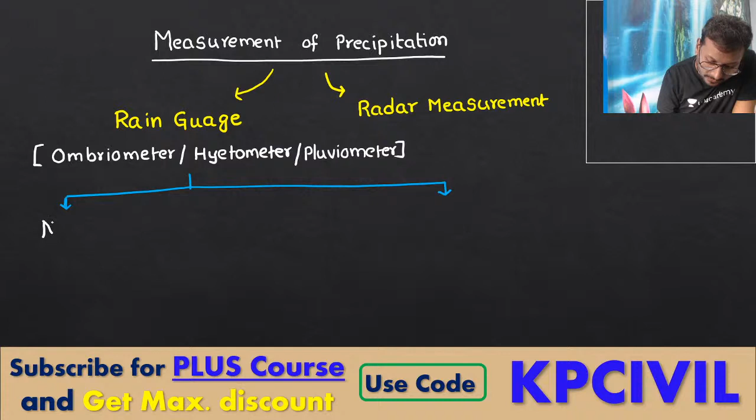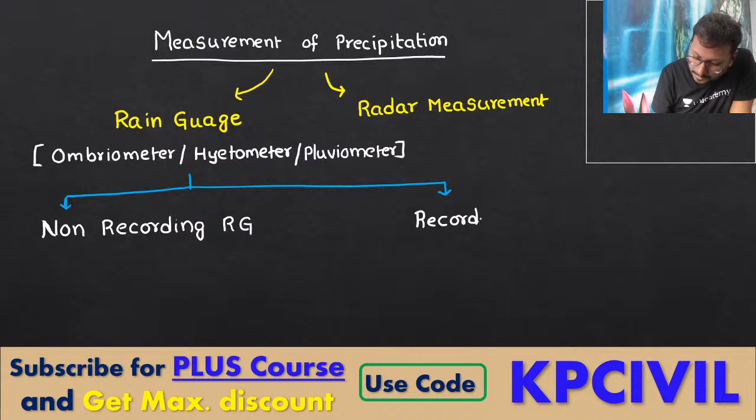Pluviometer. The other names for the rain gauge: ombriometer, hyetometer, pluviometer. Again, rain gauges have been classified into 2 types. Based upon how they perform the work, rain gauges are classified into non-recording rain gauges and recording rain gauges.

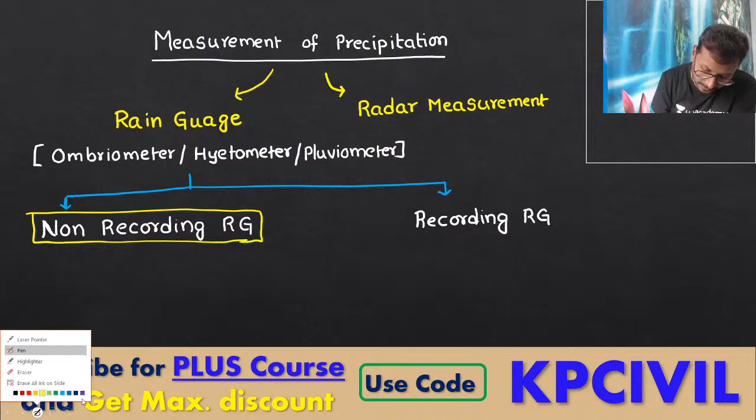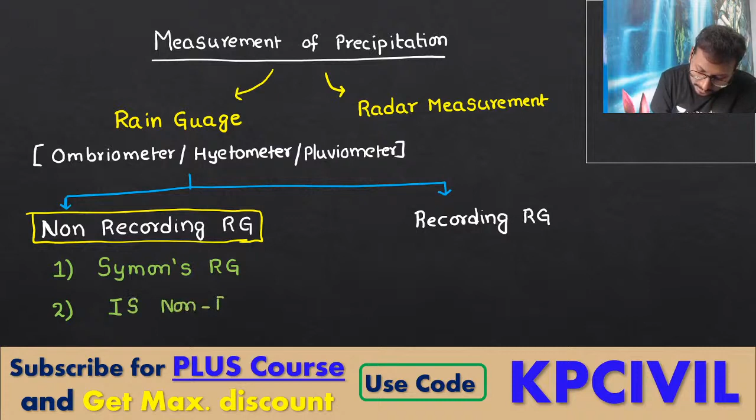Non-recording is again differentiated into 2 types. The first model of non-recording rain gauge, Symon's rain gauge. Second one, IS non-recording rain gauge, Indian standard non-recording rain gauge. Again, recording rain gauges are differentiated into three types. Tipping bucket type.

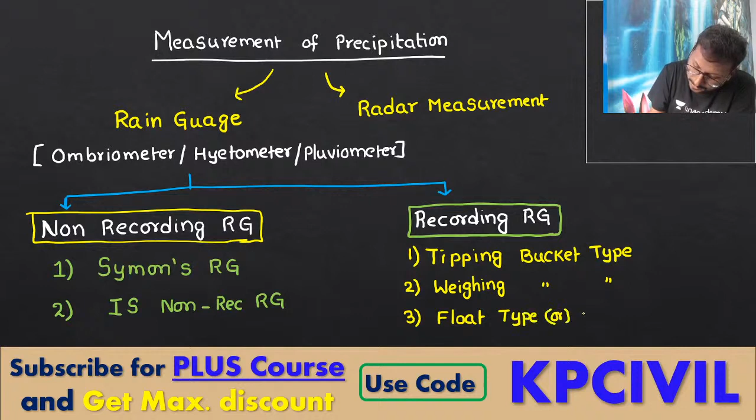Yes, Rahul, IS non-recording rain gauge. Weighing bucket type. And the last one, float type or siphon mechanism. So these are the instruments used to measure precipitation: rain gauge and radar measurement basically. Rain gauge is also called ombriometer, hyetometer, pluviometer.

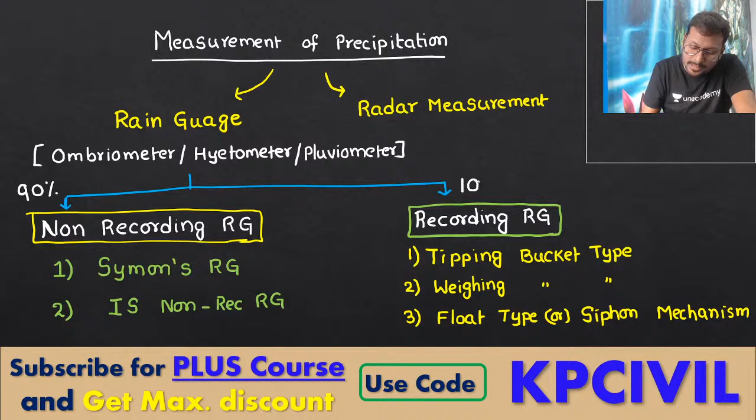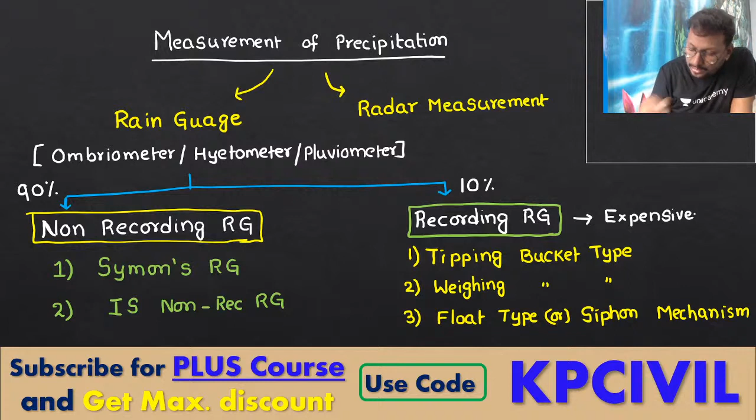Non-recording rain gauge. 90% of rain gauges provided in a certain location are non-recording. 10% of rain gauges are recording. Because recording rain gauges are costlier, expensive. We are not going for all recording rain gauges because recording rain gauges are expensive.

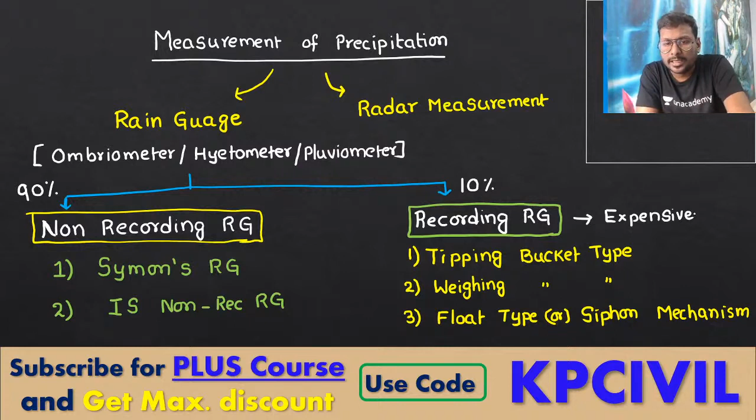What happened, Rudraji Singh? What are you saying? I am not getting it. Okay, is it clear? We'll move on. I will explain one by one. Okay, Ruxar Bano.

Non-recording type of rain gauges. Whatever I have written as RG is not RGV, it is rain gauge. Don't take it as RGV. So non-recording type: the name itself provides you the information. What is the information provided?

Non-recording does not record any result. Will a non-recording type of rain gauge give you any kind of result? Does it give any graph? Does it provide any value to you? No. A non-recording rain gauge does not provide any kind of record of the results. Then what will it do? What is the only function of a non-recording rain gauge? Tell me, any one of you.

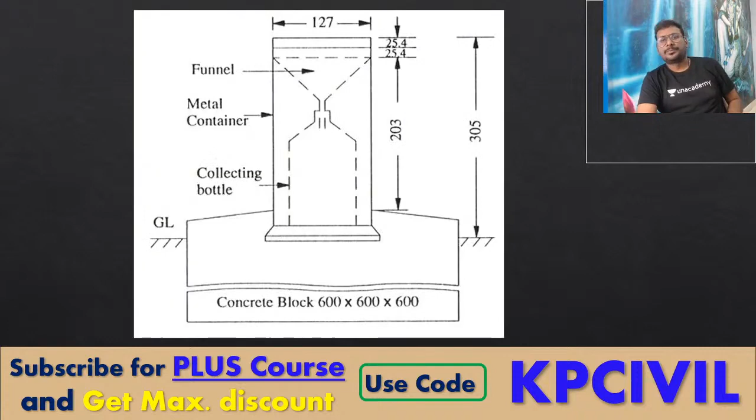The non-recording type of rain gauge just performs collection of water. Collected water is transferred to a measuring jar, then volume is estimated. Then volume by area of collector is depth. Depth by duration is equal to intensity of rainfall. How does it look? This is a non-recording type of rain gauge.

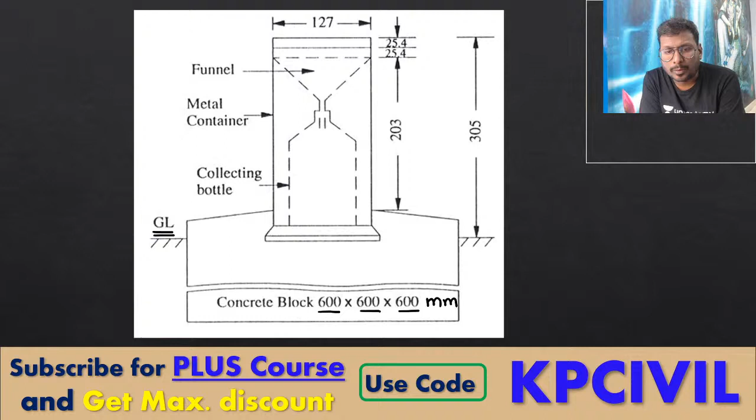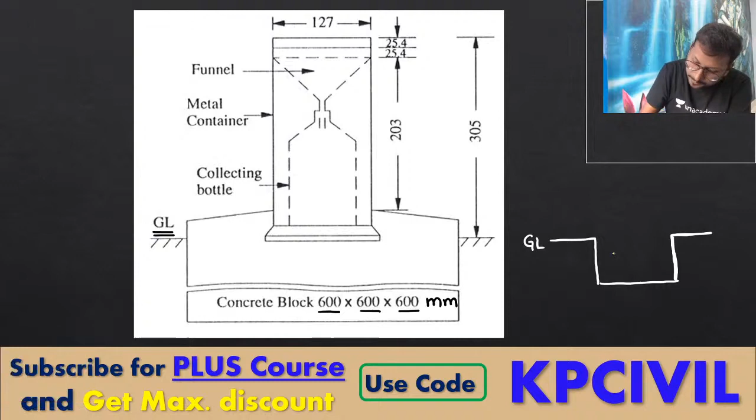So below ground level we are excavating. This is ground level. This picture gives you clear information. We are excavating 600 mm, 600 mm, 600 mm. Then a concrete block is provided, a cement concrete support. So this is ground level, we have excavated below ground level, and after excavation we are making a cement concrete support.

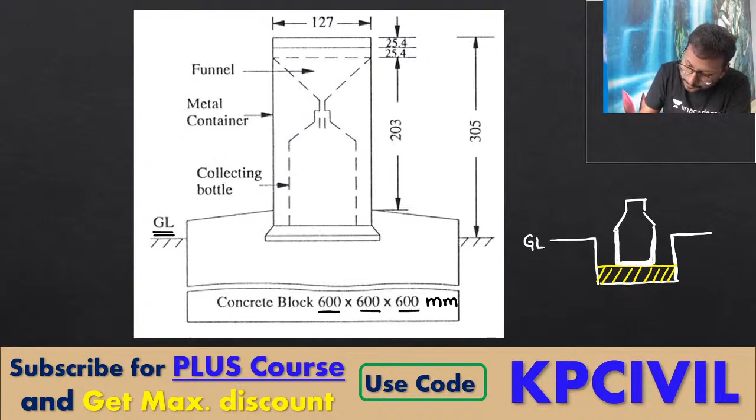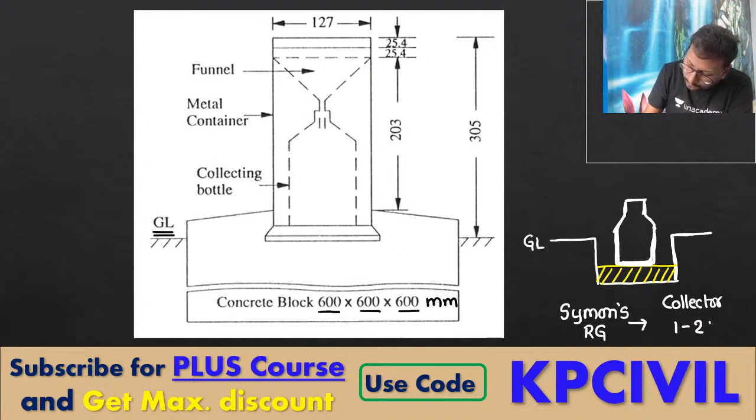Onto that cement concrete support, we are placing the container or collector. This is the only collector which collects the water during rainfall. For a Symons rain gauge, the collector collects a water quantity of 1 to 2 liters.

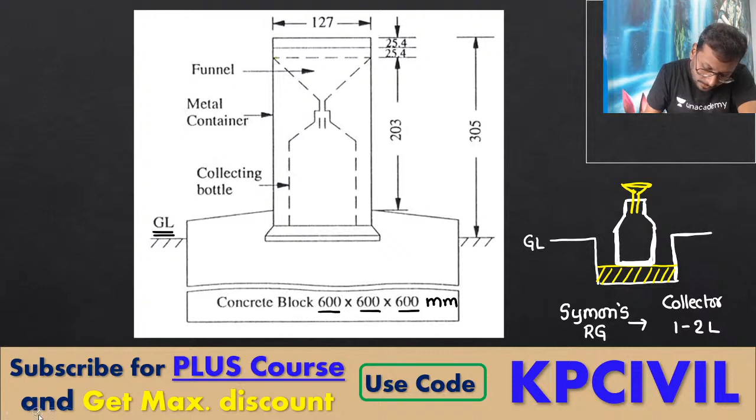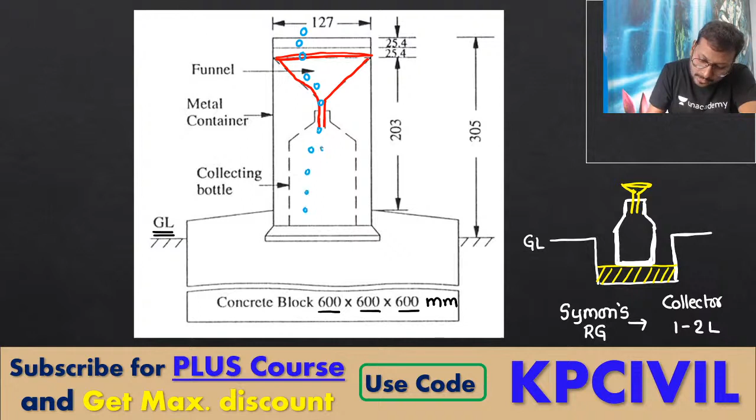And at the top of the collector, will water directly fall down? No. We are placing a funnel at the top of the collector. This is the funnel provided here. I think you understand by this diagram. The collector is placed in a box. Water droplets from the atmosphere fall drop by drop into the funnel, then from the funnel to the collector. So rain water droplets are collected in the collector. Is it clear?

Very important thing, you can write down very clearly. The diameter of the collector provided is 12.7 centimeters, and the height of the rain gauge provided is 30 centimeters. These two values are very important for you. What is the diameter of the collector? They will ask you a theoretical question. The diameter of the collector is clearly written as 127 mm; in the picture, the values provided are in millimeters. 12.7 cm is the diameter of the collector, 30 centimeters is the height of the rain gauge.

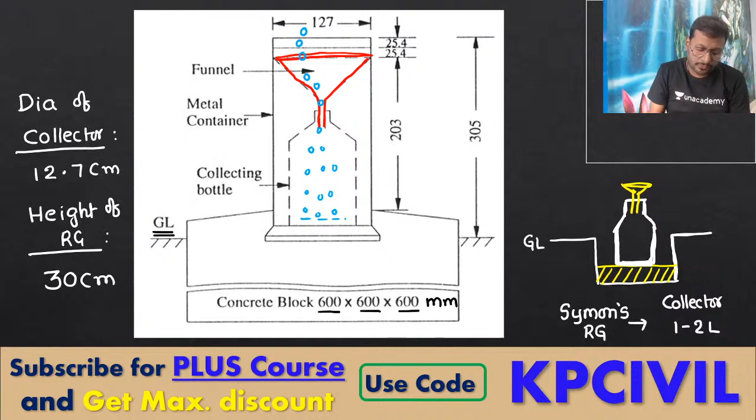So water falls down from the atmosphere to the funnel. The funnel will collect and release water into the bottle, the collector. After completion of rainfall, water is transferred from the collector to the measuring jar. We estimate the volume of water collected, divide by area, and get the depth of rainfall. Okay? Then, what is the difference between the Symons rain gauge and the IS non-recording rain gauge? Everything is the same except two things.

It is an improvised one. IS non-recording rain gauge is an improvised Symons rain gauge. You can write down like this only. Improved. IS non-recording rain gauge is an improved Symons rain gauge. What is improved in the Symons rain gauge?

First of all, material. In Symons rain gauge, it may be glass or aluminium material. Now, IS non-recording rain gauge, fiber reinforced polymer, FRP material. That is the improvement in the Indian standard non-recording rain gauge. You understand the point? Symons rain gauge is made of glass or aluminium, but Indian standard non-recording rain gauge is provided with fiber reinforced polymer FRP material.

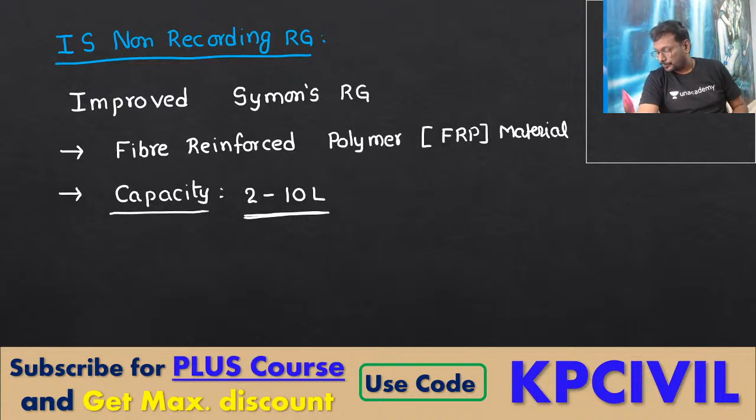What is the capacity here? Symons rain gauge, written clearly, collector capacity 1 to 2 liters. But Indian standard non-recording rain gauge collector capacity is 2 to 10 liters, to avoid replacement of the collector time to time if heavy rainfall occurred. These are the two most important differences between IS non-recording rain gauge and the Symons rain gauge. Clear? We'll move on now.

Disadvantages of non-recording rain gauge. Observer must be present, it is manual. Presence of observer 24/7. Then, replacement of collector after filling.

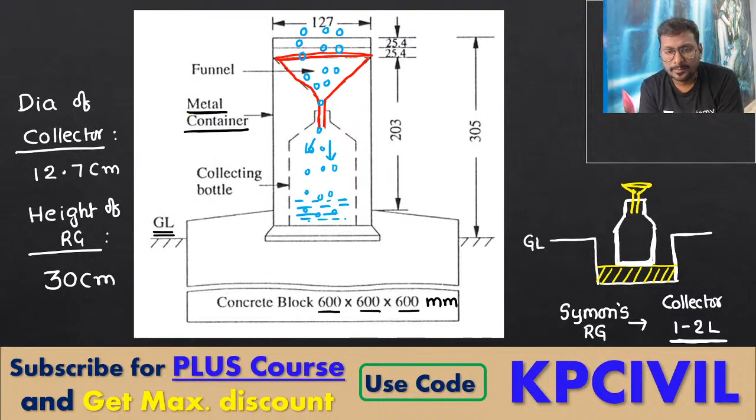So during the replacement of the old container by the new container, taking out the filled container and placing an empty container, some quantity of rainfall water is not collected. Missing collection of water during replacement.

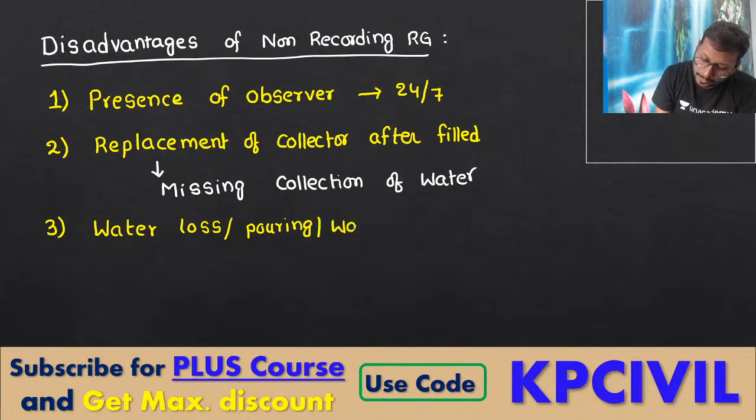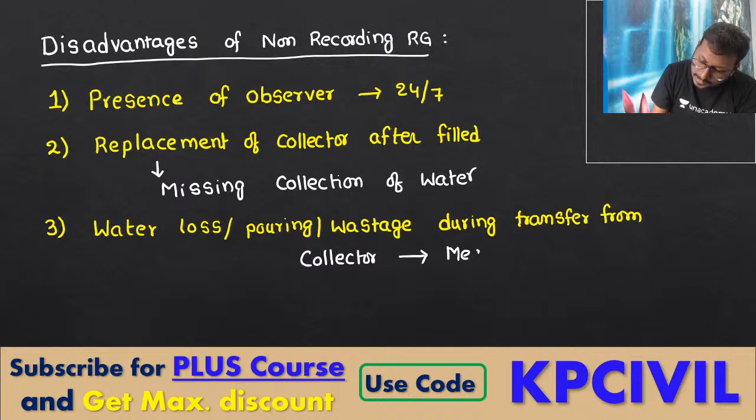Then, water loss or pouring or wastage while you are transferring from collector to measuring jar, because you need to measure volume. During transfer from collector to measuring jar, some quantity of water spills out.

Will you do it carefully? Most government employees, observers, will just transfer from one container to the other. So spilling, loss and wastage of water will happen. Even normally, when you transfer water from one container to another in the lab, some droplets of water get wasted.

And finally, everything related to the non-recording rain gauge is manual work. During this manual work, will you get an accurate value? You got a government job, you became an observer at the rain gauge station. Every day, throughout 365 days, you wait for rainfall, suddenly rainfall occurs. Will you do your manual work perfectly? Even if you do, the value obtained is not 100% accurate. It is always an approximate value.

So to overcome all these disadvantages of non-recording rain gauges, we have recording rain gauges. Okay. We'll discuss recording type of rain gauges.

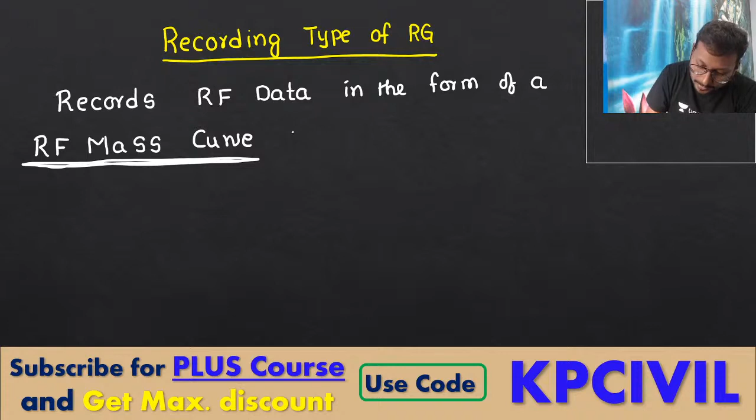So what is it providing? A recorded evidence for the rainfall data. The recording type of rain gauge provides a recorded evidence. What is this recorded evidence? A graph. The graph is the recorded evidence for the rainfall data.

So what graph is it going to plot? It is going to plot time versus cumulative depth of rainfall, time versus increased depth. Time to time, depth increases. Rainfall happened for 6 hours: first hour depth, second hour depth, third hour depth, time to time all added up.

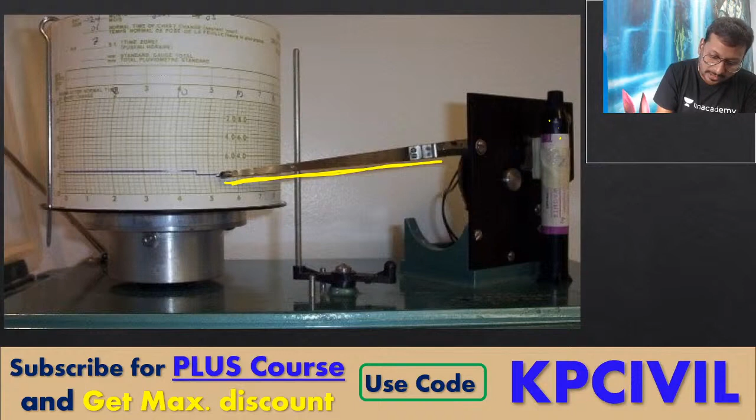So in the same manner here, see this picture. This is a clock driven drum associated with a pen arrangement. The pen with ink is there, the drum rotates continuously like this, and this is the graph sheet. So the graph is plotted by the pen.

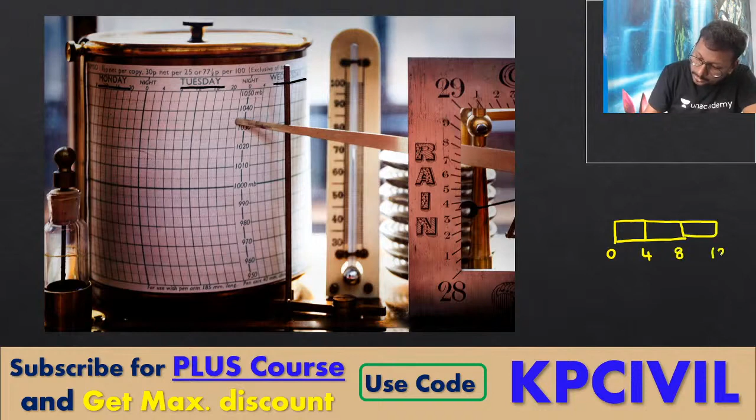A very clear picture I will show you. See here. Now I think it is visible very clearly to you. Monday, Tuesday, Wednesday - the total day of 24 hours is differentiated into boxes. What is one box equal to? On the graph sheet, one box equals 0 to 4 hours, the second box 4 to 8 hours, and like that, total 6 boxes - one day equals 6 units on the graph sheet.

Yes, plotting the graph is automatically done. Is it clear now? This clock driven drum is provided here, and the drum rotates with respect to increase in depth of water. So with respect to movement or rotation of the drum, the movement of the pen changes, and ultimately the increasing graph is plotted.

You got the point? It is always increasing, the mass curve. Mass curve means you are taking cumulative values. If I say cumulative values, take time as 0, 2, 4, 6, 8, 10.

Rainfall provided: 0, 4 mm, 3 mm, 10 mm, 6 mm, 2 mm. So what are the cumulative values? Now I need cumulative rainfall. We can add: 0, 4, 7, 7 plus 10 is 17, 17 plus 6 is 23, 23 plus 2 is 25. The value goes on increasing only now. If you plot this on the graph sheet, the value will keep increasing only.

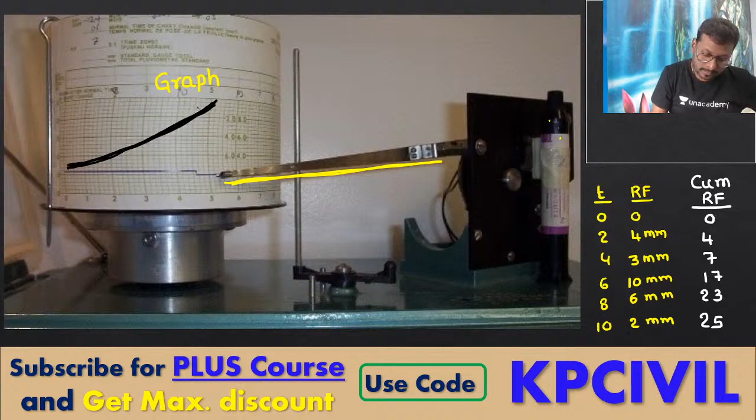So we can write it down: 0, 4, 7, 17, 23, 25.

So will there be any fall down of the graph? The graph continuously goes on increasing because we are plotting cumulative rainfall versus time. Cumulative rainfall versus time is always increasing.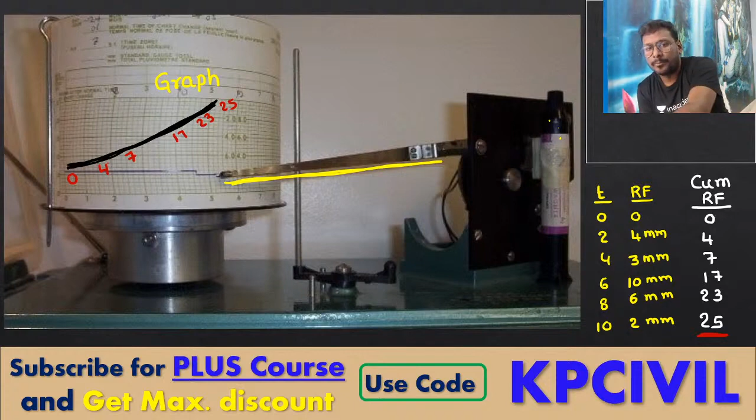What does the last value represent? The last value represents the total depth of rainfall. The last value of cumulative rainfall represents total depth of rainfall. Is it clear for everyone? Anyone needs repetition for it?

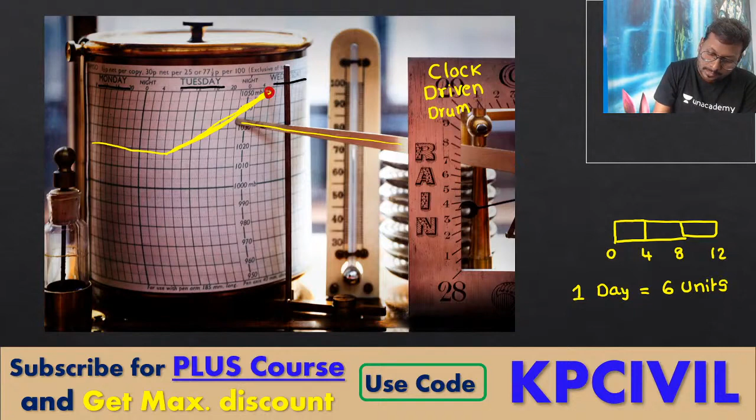Total depth of rainfall, the final value of the rainfall mass curve, this value is representing total depth of rainfall. That is only representing total depth of rainfall.

Okay, clear for everyone? Nice.

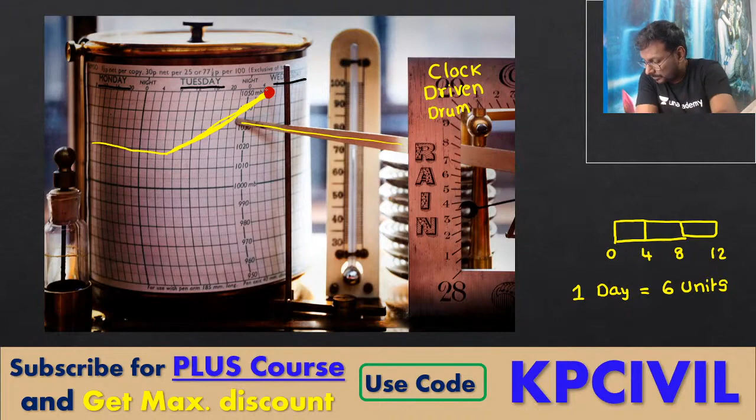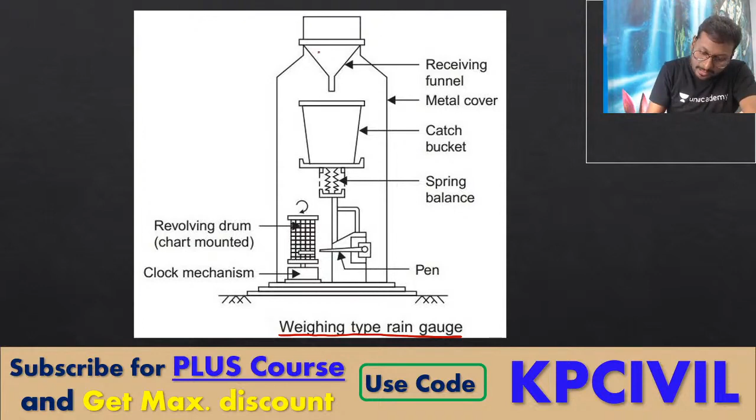Weighing bucket type of rain gauge. The name itself gives you a clear picture. From the funnel, water is falling down, water droplets collected. From the funnel, water droplets fall down into the bucket provided on the weighing balance.

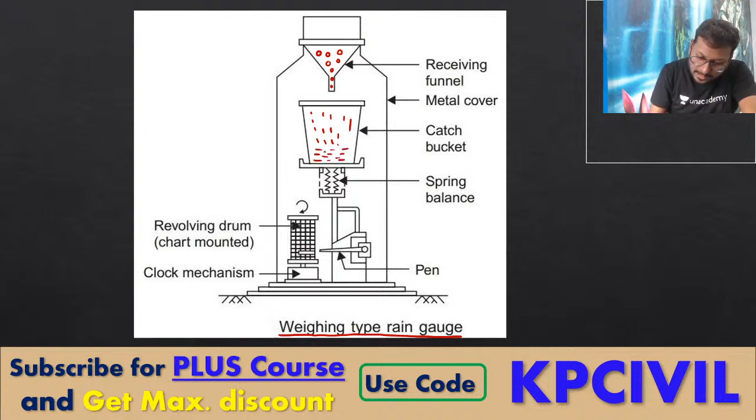So what happens if you place some weight on the weighing balance? First you place some 500 grams weight, then you place one more 500 grams weight. The weighing balance platform, this is the platform of the weighing balance.

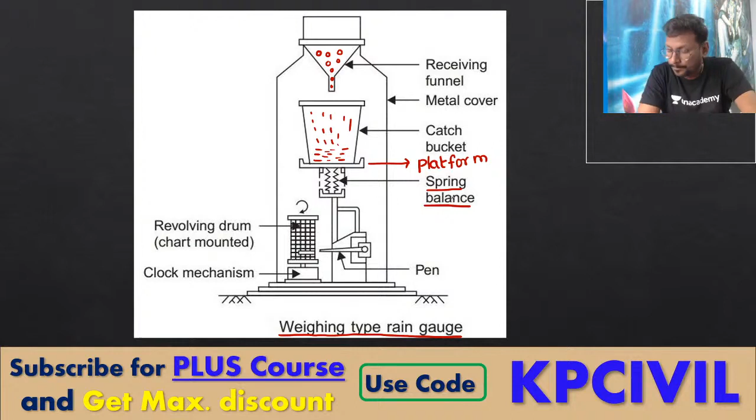And below the platform, what does it contain? It contains a spring balance, very important. Below the platform, it carries a spring balance. What happens to the spring? Weight goes on increasing, spring compresses. You got the point?

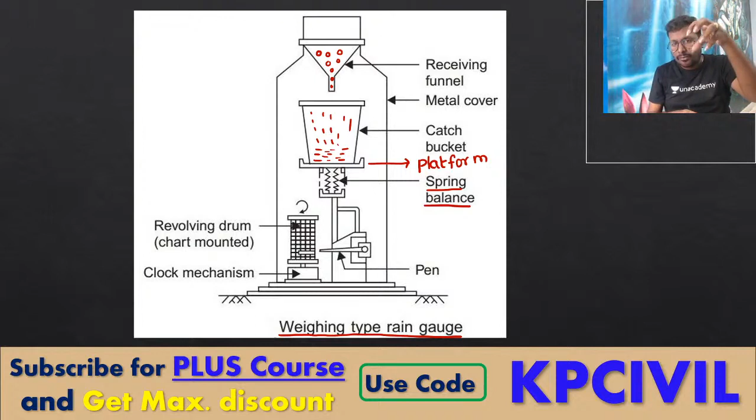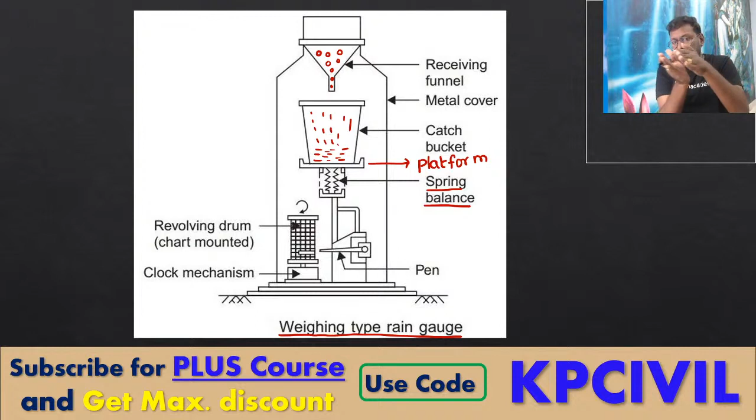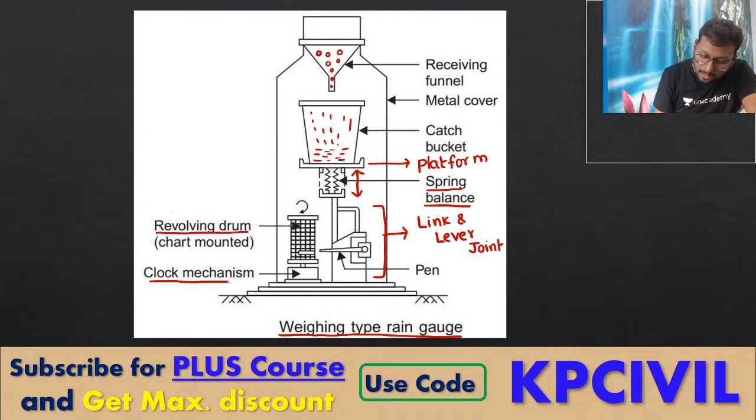This is called the link and lever joint, associated with the clock driven drum. This is the revolving drum, clock mechanism, and this one is the pen. You got it? With respect to time, the clock mechanism drum is rotating.

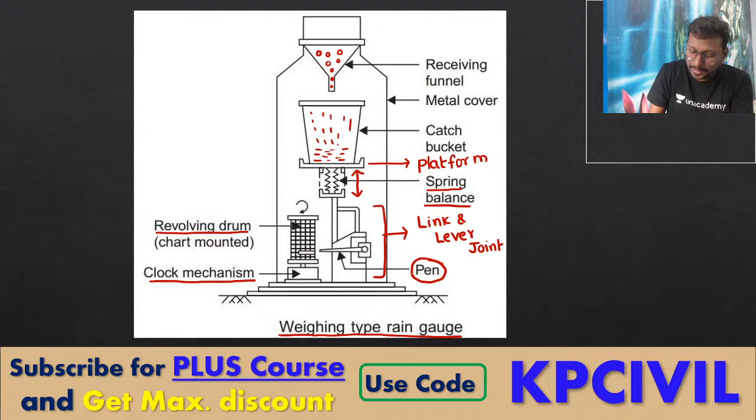With respect to clock time, the drum is rotating. What will the pen do? With the compressions provided by the spring balance through the link and lever joint, the pen will mark on the graph sheet.

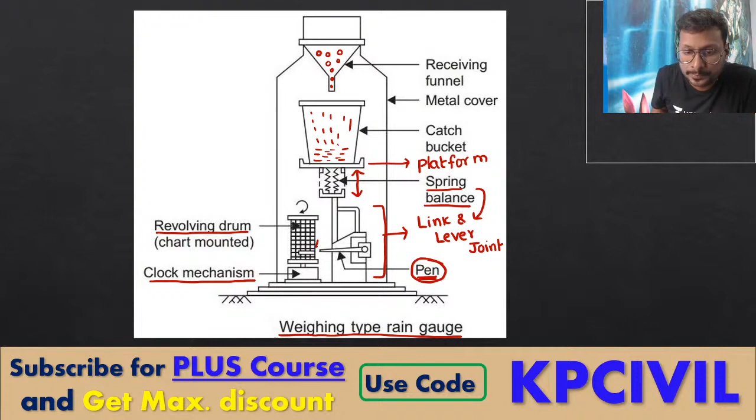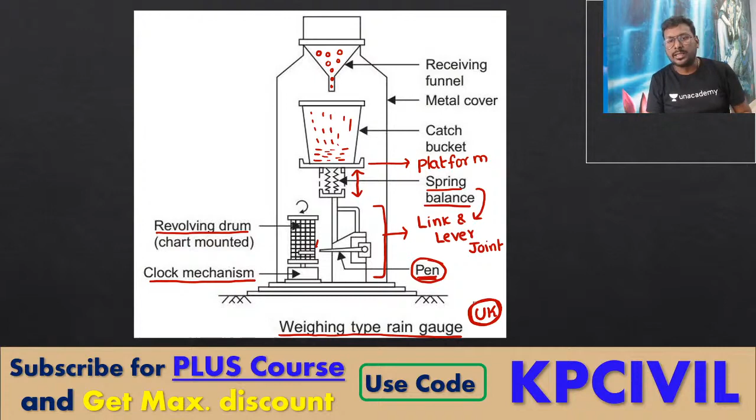So this is called the weighing bucket type of rain gauge, mostly used in UK. Okay, we'll move on now.

Actually, you don't have any question related to recording type rain gauges, they will just ask the names. Only for AE and AEE, in any exam till now there are no questions related to recording type of rain gauges, they will just ask you about the names.

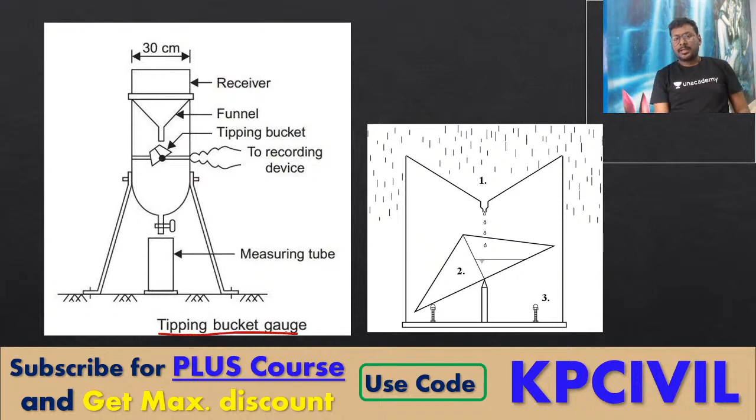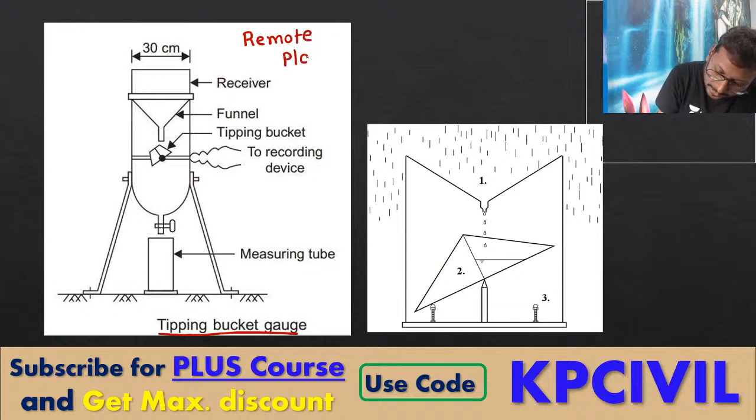Tipping bucket type of rain gauge. This is most suitable for remote places or inaccessible places. What are remote or inaccessible places?

Dense forest areas, hills and mountains. Regularly we are unable to go to those places. Can an everyday observer go there? Dense forest areas - will an everyday observer be able to go there? No.

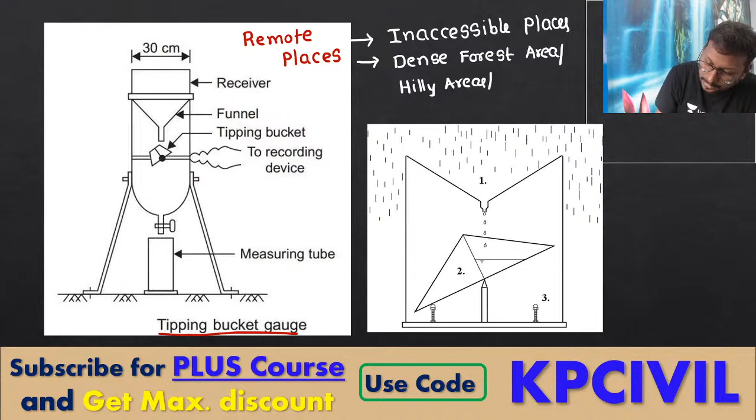For those dense forest areas, hilly areas, mountains, we place the tipping bucket type of rain gauges. Clear? An everyday observer is not going to go to that location. So for those inaccessible places - dense forest area, hilly area and mountains - tipping bucket type is most suitable.

Two buckets are provided here. This picture shows bucket 1 and bucket 2. Two buckets are provided, rainfall falls down through this into bucket 1. Bucket 1 is in a slant position.

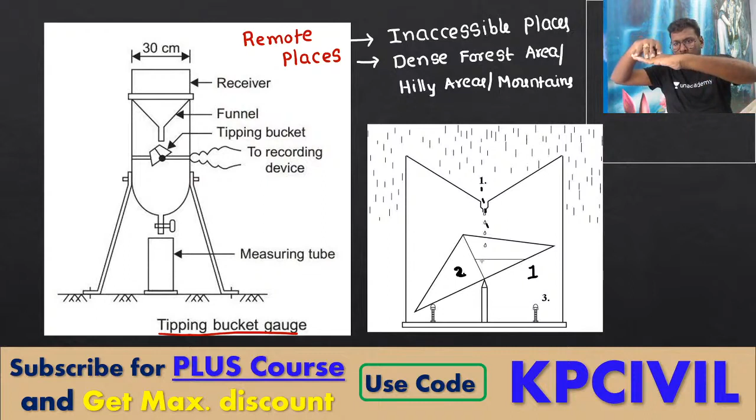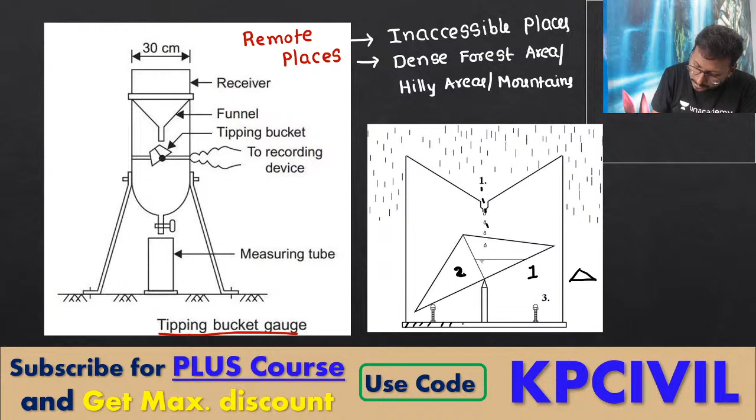With increased water content in bucket 1, bucket 1 in the slant position slowly moves, coming to normal position. Then there is a movement of the platform. The platform will move immediately whenever bucket 1 comes to the normal position like this. This platform is going to show one forward movement.

It just moves in the forward direction or just moves backward. By filling one bucket - for example, bucket 1 is filled, it comes down to the flat position - immediately it shows one forward movement. When it shows forward movement, which bucket is coming below the funnel?

Bucket 1 and 2 are arranged like this. This is bucket 2, this is bucket 1. The funnel is located here, and it moves forward. The empty bucket, bucket 2, will come now to the funnel, below the funnel. Bucket 1 moves forward, then bucket 2 starts filling with water, and immediately bucket 1 becomes empty. Both occur at the same time - this is the tipping mechanism. So from here this bucket is filling the water, and from here this bucket is emptying the water.

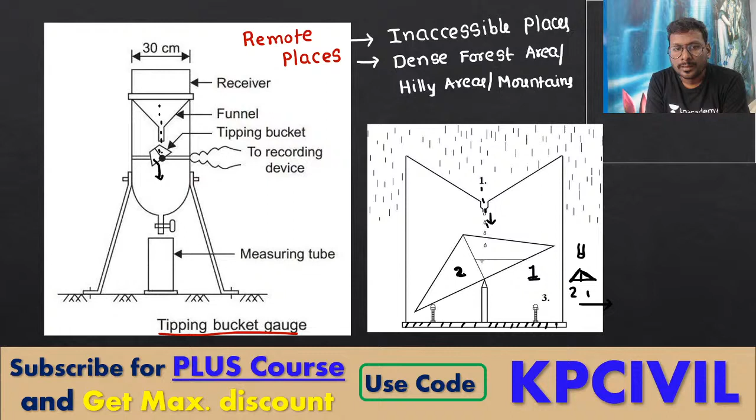So filling the water in bucket 2, emptying the water in bucket 1, both occur simultaneously. For one complete filling of the bucket capacity, what is it equal to? Very important: one complete filling of bucket capacity is equal to 0.25 mm depth of rainfall.

So by this forward movement, it gives information to the clock driven drum. What do the clock driven drum and pen do? Information is given to the pen - one forward movement gives one line, one backward movement gives one more line, again one forward movement gives one line. So it is not a cumulative rainfall curve.

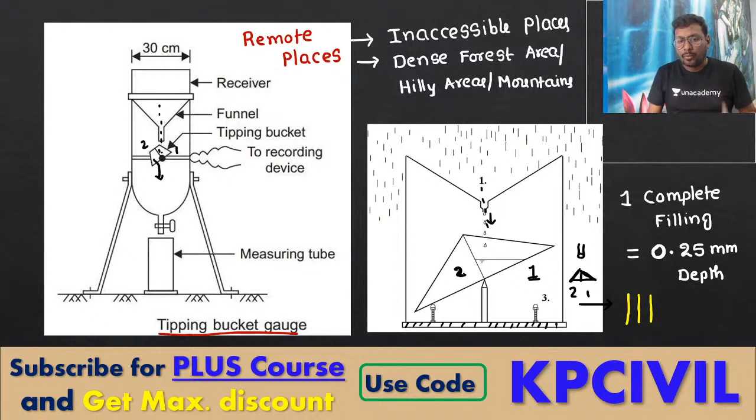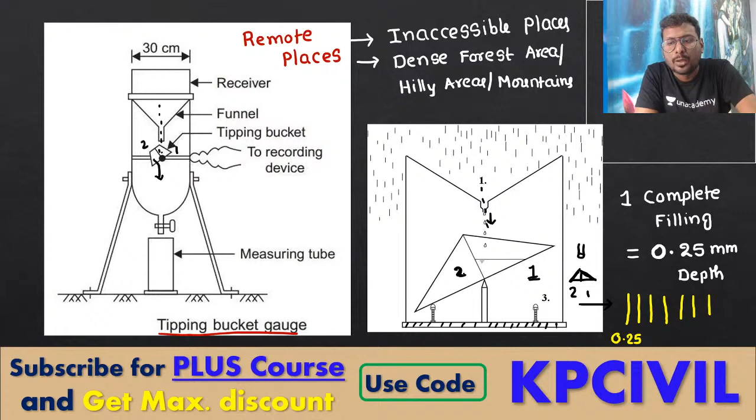Only weighing bucket type and float type gauges form cumulative rainfall mass curves. The tipping bucket does not form a mass curve - just the pen associated with the tipping bucket forms vertical lines. One vertical line is equal to 0.25 mm. Finally, by the end of rainfall, what are you doing? You are counting the number of lines.

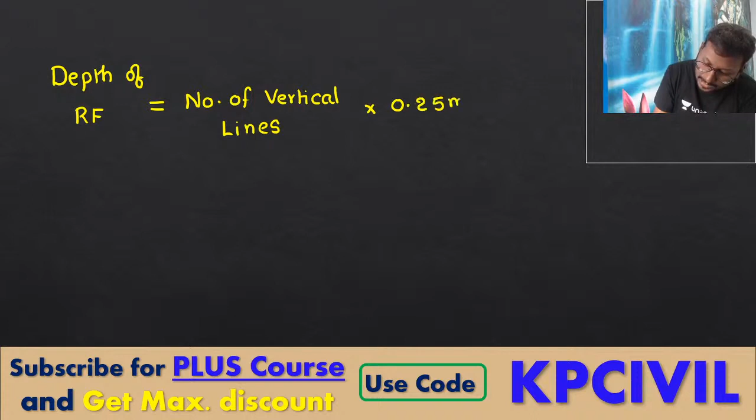Depth of rainfall is equal to - by the end of rainfall you take the graph sheet and measure depth of rainfall equal to number of vertical lines into 0.25 mm. So the graph sheet is not forming a mass curve here. Clearly remember, tipping bucket type graph sheet does not form a mass curve. It forms, as I showed, vertical lines - just plot one line like that. One vertical line is equal to 0.25 mm depth of rainfall.

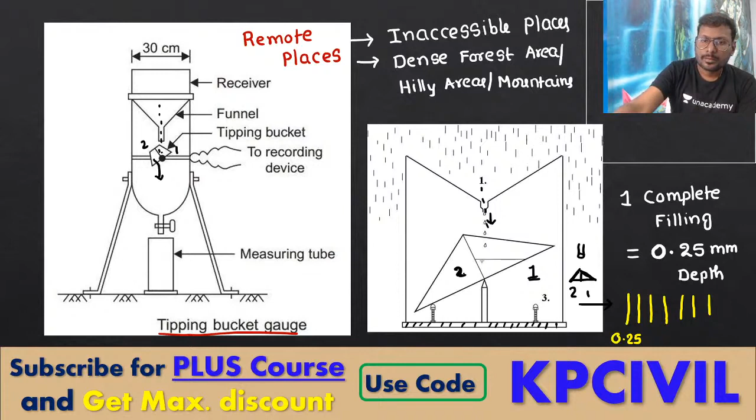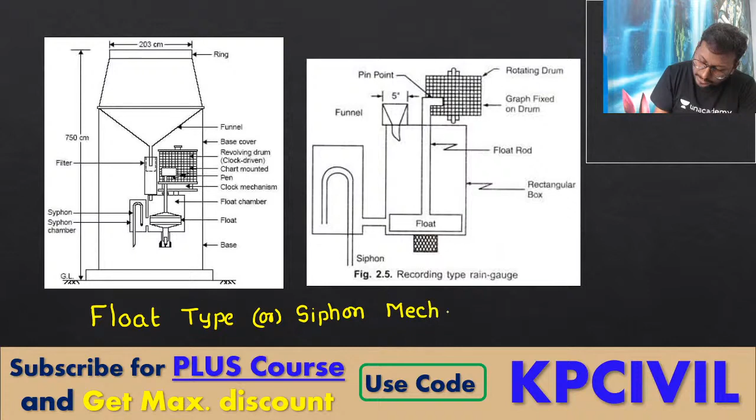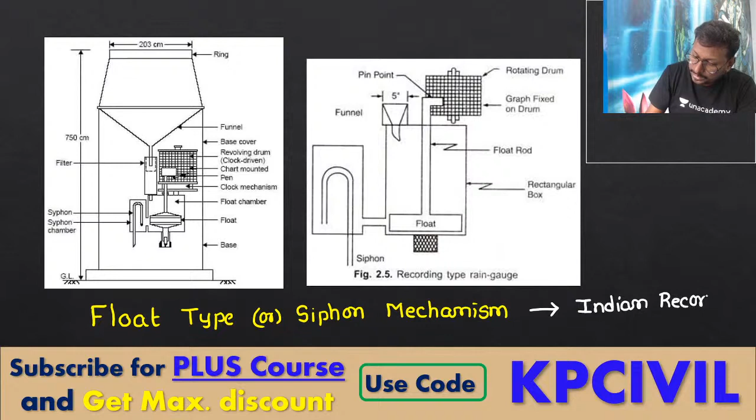We'll move on now. This is a float type or siphon mechanism. What is the importance of this? This is the Indian recording rain gauge - the Indian model of recording rain gauge uses the float type or siphon mechanism.

So the funnel is loading the water through it. Then with increasing water quantity, what happens? The float rises up - you are throwing some plastic ball, thermocol sheet, or cork. If water depth rises up, the float also rises. The float is a material which increases or decreases its elevation with respect to the water. So the volume of water entering into this float chamber, this rectangular box, is called the float chamber.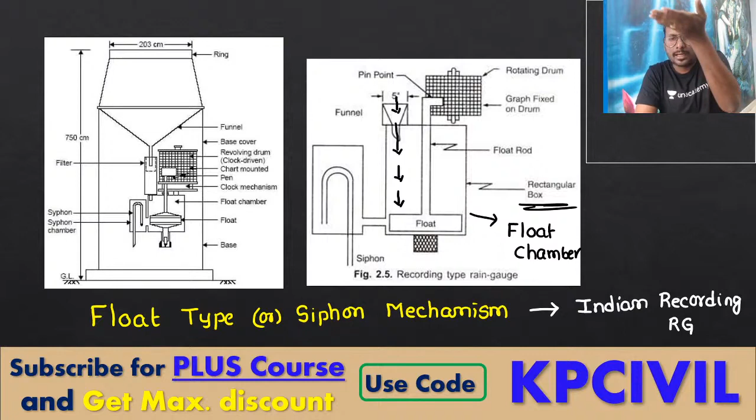Volume of water entering into the float chamber increases as rainfall water increases - what happens? The float rises up, since water is falling down into the float chamber. So the amount of water increases, depth of water rises up, and float depth also rises up. Again, as in the rainfall mass curve, the pen goes on increasing with respect to the rise of water, up to a depth of 150 mm.

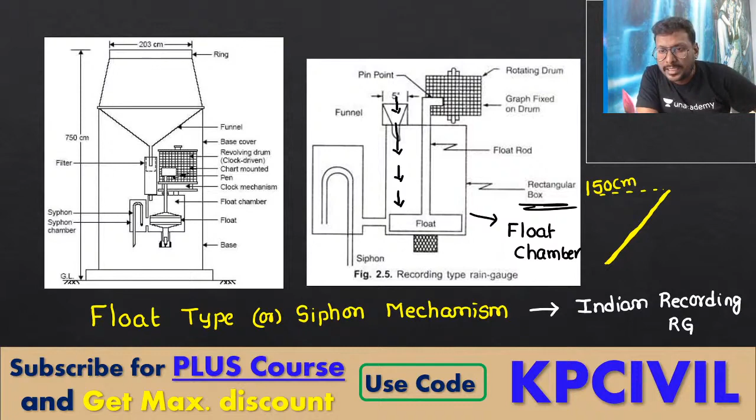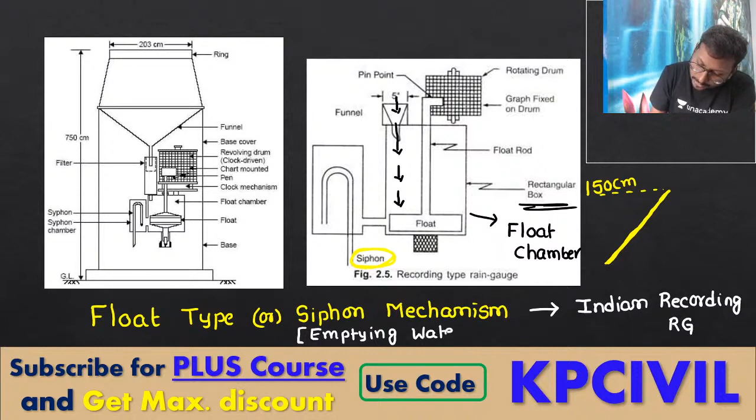When the float chamber is nearly filled, immediately we open the siphon chamber. What is the siphon mechanism? The siphon mechanism is required for emptying the water from the float chamber. Water is transferred - we open the valve located here, and water is transferred from the float chamber to the siphon chamber, which will then empty the water.

Again, I am repeating for clarity: from the funnel, water is entering into the float chamber drop by drop. With increase in water surface elevation, the float, placed here, rises. Consider this pen as the float - this is the water surface, so when water rises up, the float also slowly rises, and the elevation of the float rises up too. When the elevation of float reaches the maximum point in the float chamber, you immediately open the valve located here. Then water is transferred from the float chamber to the siphon chamber, which pumps the water vertically upward, and then the water is emptied downward, falling down here.

You got the point? Then the float falls down. When the float is at the top, it reaches 150 mm. Whenever the float comes to the normal position, a vertical line is plotted as the pen falls down. The pen rises up along with the rise of the float. Whenever you empty the water in the float chamber, the float immediately comes downward. Is it not? So I have placed it here.

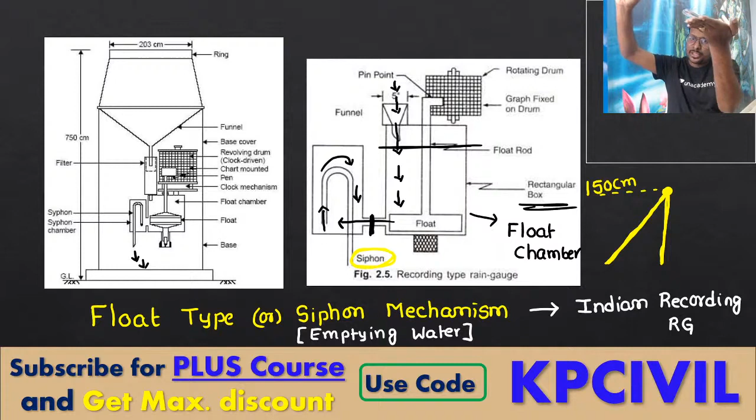This is water, this is the float. The float rises up and reaches the maximum. This is the maximum point, 150 mm. Then the pen also reaches the maximum point. The pen is plotting on the graph like this, so the pen is also in the top position. You open the siphon. When the siphon is open, the float falls down and the pen also falls down, exactly in a vertical position. Clear?

So what is the maximum capacity? Maximum capacity is 150 millimeters, 15 centimeters. The pen falls down. Still the rain is continuing. Again slowly the pen rises up with the rise of the float, again up to 150. The same continues till the end of rainfall. When it falls down, one vertical line. So one complete inclination is equal to 150 mm.

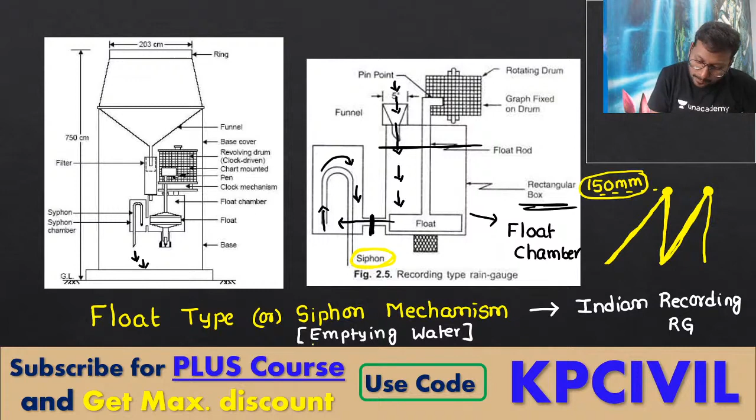After completion of rainfall, you take the graph sheet and you can analyze it. Got it? Clear for everyone? This much mechanism is not required for your AEE exam. Only remember one point: Indian type of recording rain gauges. What is the Indian type of recording rain gauge? Float type or siphon mechanism. For what purpose is the siphon mechanism required? For emptying the water. Okay? We'll move on.

Number of rain gauges required. So we are discussing here according to Indian standards. First one: for plain, flat, normal areas. Plains, flat regions and normal areas. Clear? For this, we will provide one rain gauge per every 520 square kilometers.

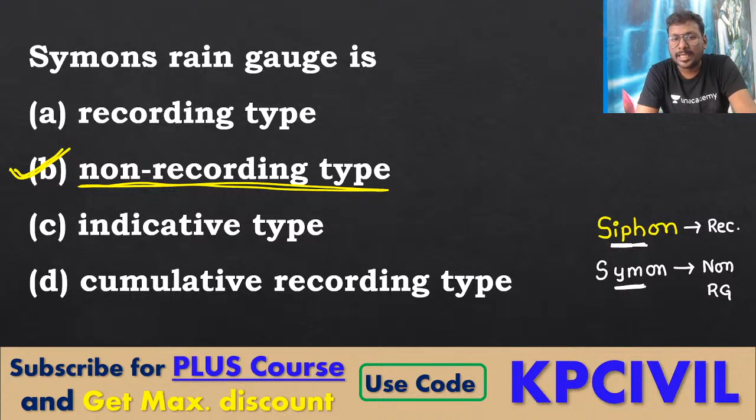Suddenly if they give siphon, don't confuse. This is Symon. Symon is non-recording. Siphon is recording. So, just two letters difference. Clear? Carefully read the spelling and then answer the question. Symons is non-recording.

The type of rain gauge used for measuring rainfall of an area. Where are we considering area? Are you considering any area in recording type of rain gauges? No. In recording type of rain gauges, we are not at all considering area. Only in non-recording type of rain gauges, Symons.

GAUGE. Sandeep Kumar, GAUGE is the correct spelling.

Standard height of a rain gauge is? I have written clearly, standard height of 30 centimeter, diameter of 12.7 centimeter. Clearly mentioned. So answer is 300 mm. Look, sure it is C, it is not B.

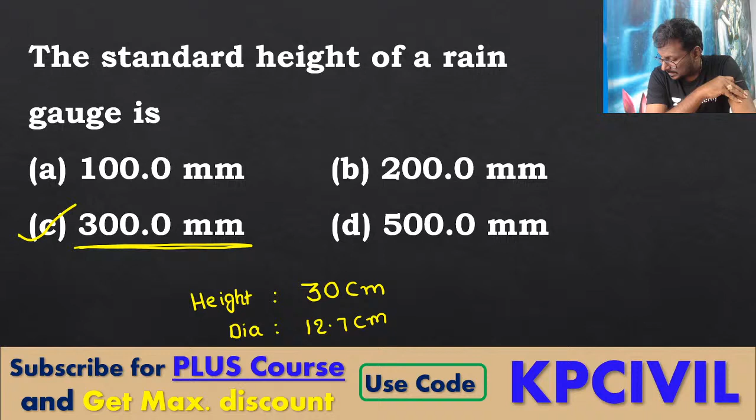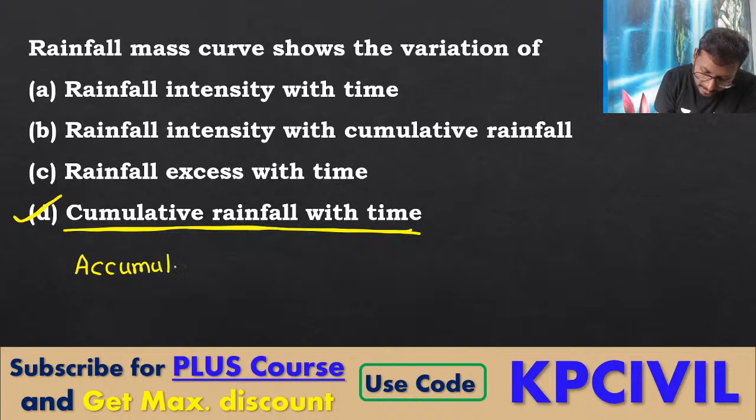Rainfall mass curve shows the variation of? What are we plotting? Rainfall mass curve is cumulative rainfall with the time. Sometimes they will give accumulated flow versus time also, remember. Accumulated flow versus time, cumulative rainfall versus time.

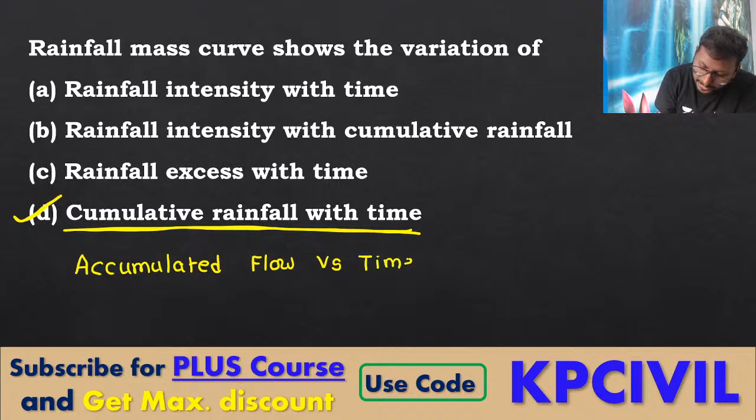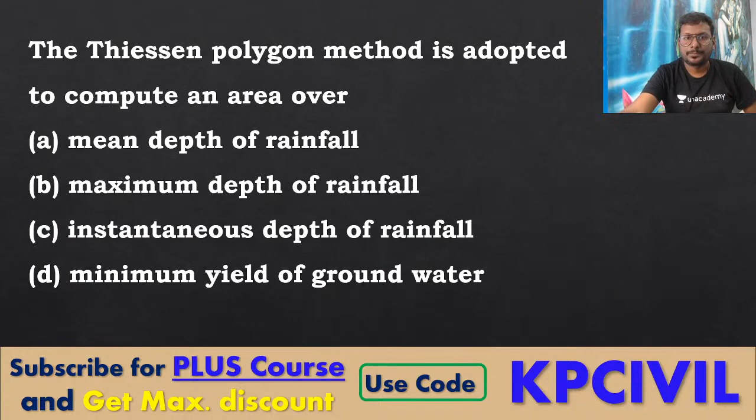We will continue tomorrow.